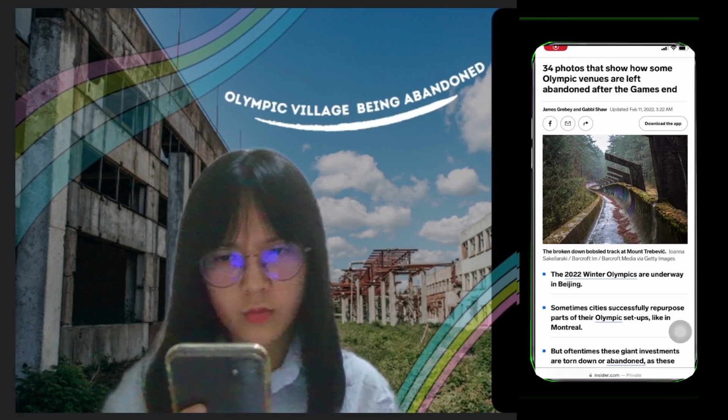Photos that show how some Olympic venues are left abandoned after the game ends. The broken down bobsled track at Mount Trebević. A set of Olympic rings in an abandoned former swim hall at the site of the 1936 Berlin Olympic Village. The media podium at the ski jump venue.

Oh my god, look at this! So terrible. Wait, Malaysia is going to organize Olympic 2024? So how will Sahira solve this issue? So, are you worried about our upcoming Olympic in 2024? No, you shouldn't be worried about that. Just let me bring you to our whole new Green Olympic Village design.

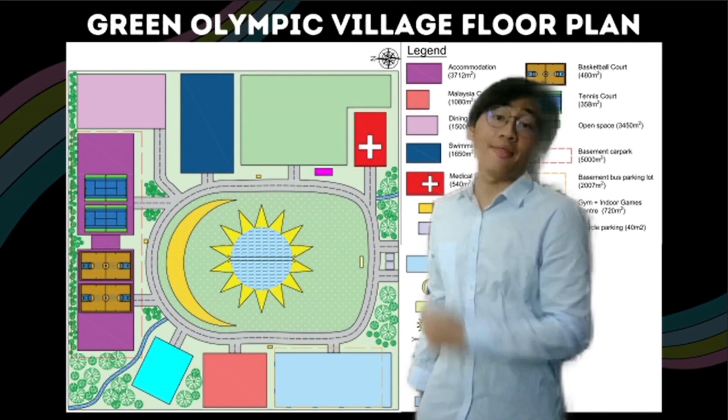Here is the Green Olympic Village plan. Our design is fully considered and follows the GBI rating system. So, in our design, do you think that we only focus on sustainability? Definitely not. We are still focused on family and also cultural aspects in our design. As you can see, there's a lot of things that we can do to encourage Go Green campaigns.

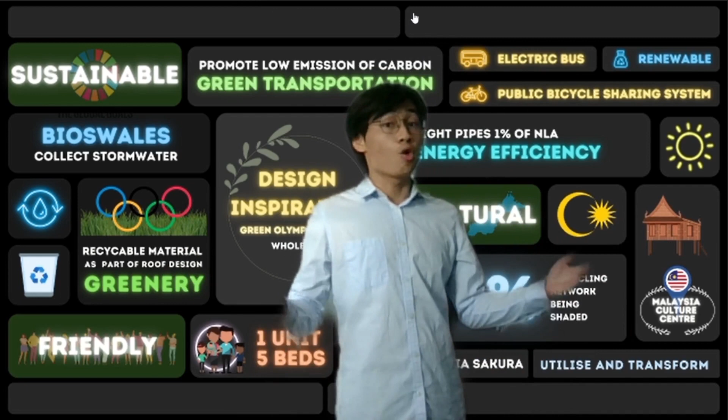Malaysia's new Prime Minister, Ismail Sabri Yaakob, has announced a goal for the country to become carbon neutral as early as 2050. Hence, we introduced Green Plus Malaysia in our design. We have electric bus and also public bicycle sharing system. Therefore, Olympic players can travel conveniently in the village. Having light pipes 1% of NLAs in our facilities, it can obviously provide sufficient sunlight and reduce the electricity cost.

We know that Malaysia is a multi-ethnic and multi-religious country, with a lot of unique cultures here. That's why we have a Malaysia Culture Center with stilt house designs. There will be a lot of cultural information and even souvenirs over there. Applying the Crescent and 14-point star design in our village as a flexible and recreational park will be the most symbolic criteria of the combination between culture and construction.

Just now, we mentioned that we have a public bicycle sharing system. Indeed, we know that nobody wants to ride under the big sun. That's why we have 70% of the cycling network shaded by shade and also trees. We even think of how we want to utilize the stormwater. Then we decided to implement bioswales, designed to collect and transport the water runoff while also removing garbage and pollution. Yes, I know our design sounds interesting, but what's our planning for this village after the Olympic is over?

For the accommodation, we design like a family unit because we promote family in our design. There will be 5 beds in the unit, adequate to fit 1,500 people. After the Olympics is over, this can transform to a residential area as well as a lot of facilities assisted.

To provide a comfortable environment, we decided to plant Tabebuia rosea in our entire village. The nickname for it actually is Malaysia's Sakura, and it is quite trending and popular in Malaysia. We foresee that there will be a lot of players and tourists coming here to have a photo shoot. In the end, this village will get popular and it might ease the transformation from Olympic village to the residential area. Three main focus: sustainable, cultural, and friendly. Definitely will improve the quality of Olympic village for all. Thank you.

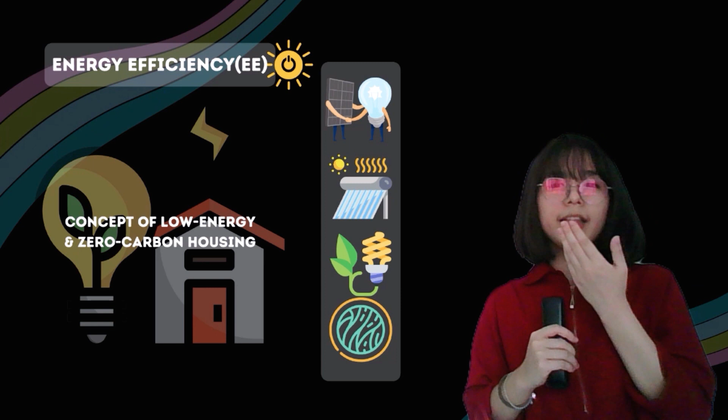I always heard that you need to buy energy efficient devices as it gives a lot of benefits, but what devices do you use inside the building? Well, for energy efficiency, we're applying the low energy and zero carbon housing concept, which aims to provide high living standard and comfort while consuming little energy and reducing the carbon footprint of the building. Firstly, it consists of an active solar energy system, which helps us to save monthly bills and also increase the resale value of the building.

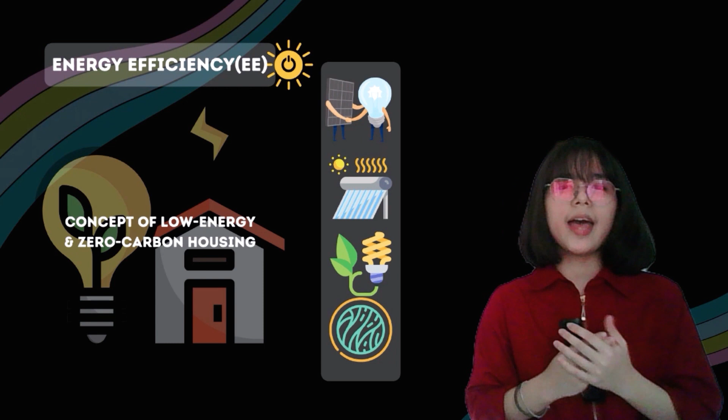Next, we apply solar water heating, which aims to reduce the air pollution and greenhouse gas emission caused by the use of fossil fuel. Thirdly, we use LED bulbs for lighting sources, as we found out that LED bulbs have a long lifespan and will significantly reduce the waste disposed and improve the environmental performance.

Oh, I see. But what could you do to improve the indoor environment quality, as it refers to the quality of the building's environment? Okay, to improve the indoor environmental quality, we apply a green heating, ventilation, and air conditioning system, known as HVAC, that uses solar energy as our power source, with the idea of having balconies with doors open in our building design.

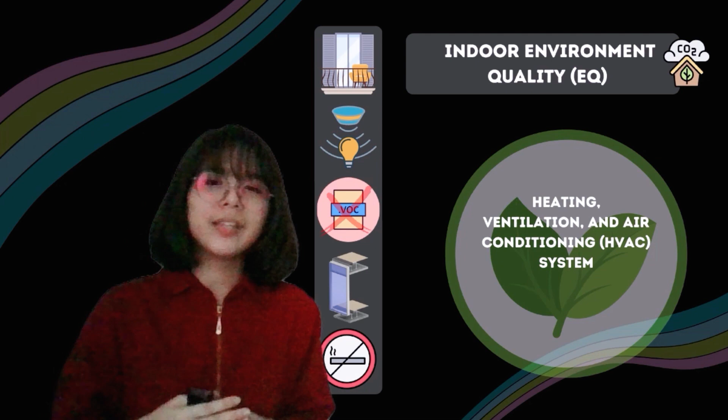There will be an installation of a smart lighting system with a motion detector, useful for safety purposes and energy saving. We also use a closed cavity facade (CCF) to provide appropriate daylighting for the building and use low VOC paint that aims to protect human health and the environment. Oh, okay, I get it.

But since summer lasts all year here in Malaysia, I'm wondering whether you have any ideas or applications for reducing the heat and sunlight in the building. Okay, to overcome this problem, we'll install roofing material with a higher solar reflectance index (SRI) to reject solar heat absorption and maintain a cooler indoor ambient air temperature in the accommodation buildings.

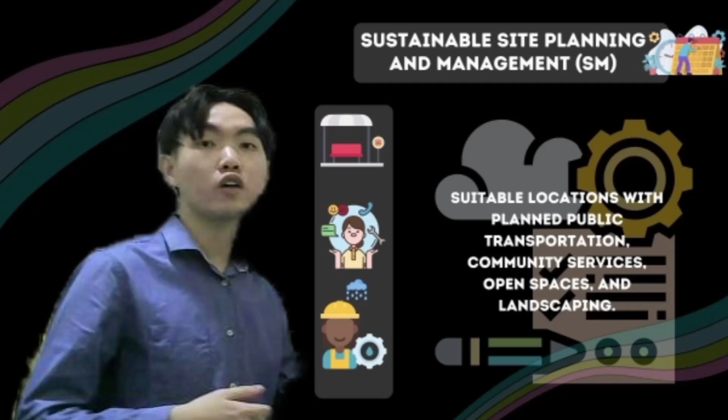So besides, based on the sustainable site planning, our village has public transport such as the electric bus and the bicycle. We also have a rainwater harvesting system to collect and store the rainwater for human use. Oh yeah, I heard just now that the entire building will use green concrete instead of conventional concrete. May I know what's the difference?

Okay, green concrete is a form of eco-friendly concrete that is manufactured by using the waste or residual material from different industries, and it requires less energy to produce. So compared to conventional concrete, it produces less carbon dioxide and is considered cheap and more durable. Besides, our whole building is mainly built from green materials such as bamboo, timber, cellulose, and others.

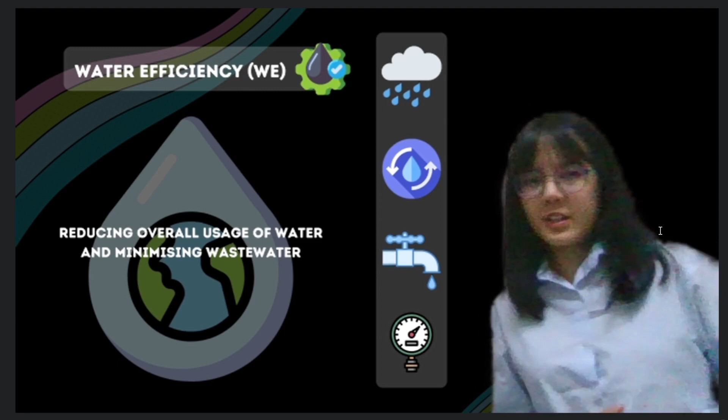Actually, I heard before about water recycling. What's your contribution towards this issue? Okay, in terms of water efficiency, one of the technologies that we have used in our building is rainwater harvesting. It is a technique used for collecting and distributing rainwater to be used for domestic purposes rather than going to the sewage. Besides, another water efficiency technology that we use in our building is greywater recycling.

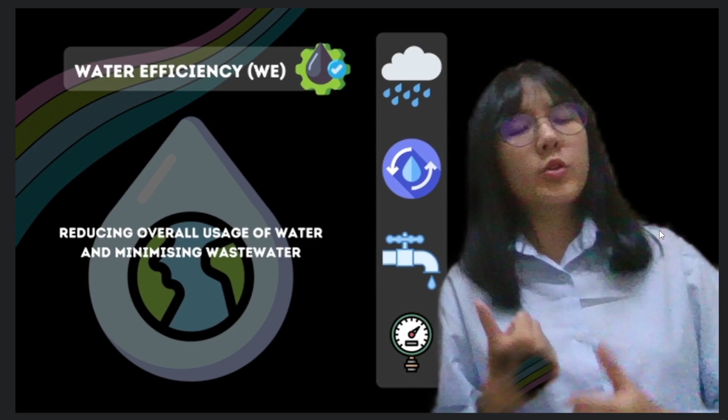It is an effective way of consuming water where the treated greywater will be returned to the buildings to be used for flushing toilets and watering lawns. The third water efficiency technology which will be used in our building is low-flow plumbing fixtures, such as faucets, shower heads, and modern toilets.

It is designed to achieve water savings by having a lower flow rate of water or a smaller quantity per flush. Not only that, it also helps us to reduce the amount owing on our utility bills by consuming less water. Nowadays, engineers keep talking about innovation and technology that is able to improve our quality of life and at the same time protect our mother earth. Can you share with me about the design?

Sure. For your information, one of the green building innovations that we use in our building is the passive house design idea. Its design principle is mainly focused on achieving indoor comfort with as little energy consumption as possible and providing comfort at low operating cost. There are 5 major passive house design principles we have applied in our accommodation, which include a highly insulated envelope, being thermal bridge free, optimized orientation with high performance windows and doors, an airtight envelope, and mechanical ventilation.

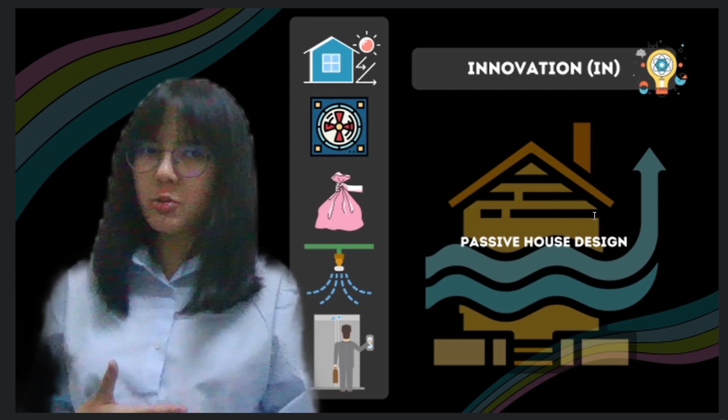Moreover, a central pneumatic waste collection system will be introduced too, with the aim of encouraging and facilitating better waste management. This system utilizes a series of underground pipes to quickly transport refuse to a sorting facility and also directly encourages recycling while making waste segregation easier as well.

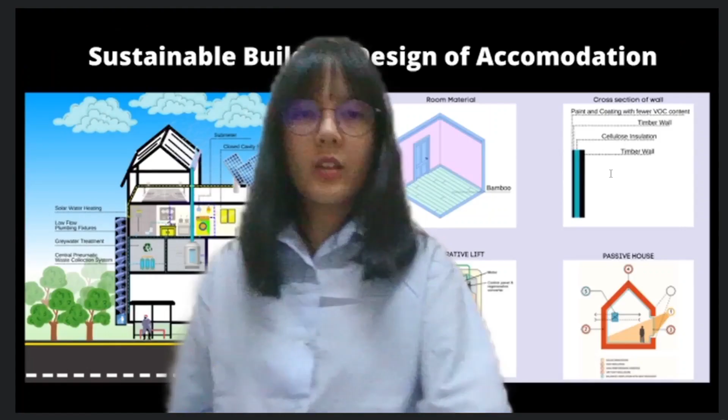Overall, this is our sustainable building design that brings 6 main criteria, which are energy efficiency, indoor environment quality, sustainable site planning and management, materials and resources, water efficiency, and innovation.

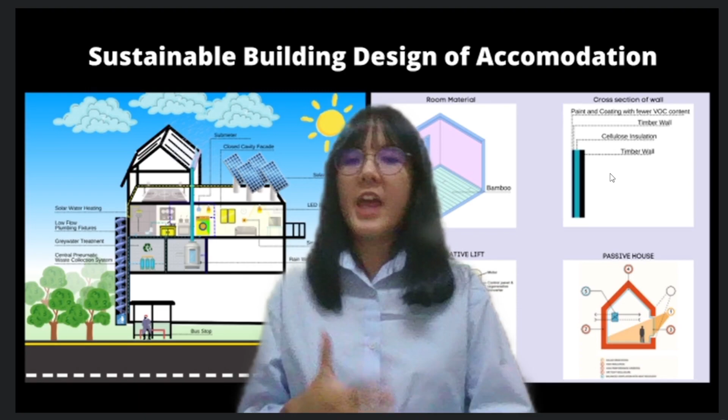Okay, so let's move on to the roof truss design of the open space. This is our roof truss design for the open space. The roof truss coverage area is about 2,800 square meters, which is 40 meters times 70 meters, and the column height is about 7 meters. And the roof truss that we are using is a flat truss.

So this is the compliance of standards. Our design has achieved all of the standard criteria, which are: the length for a single span is more than 10 meters, the column height is more than 5 meters, the roof truss coverage area is between 2,000 and 3,000 square meters, and the deflection for the roof truss is not more than 80 millimeters.

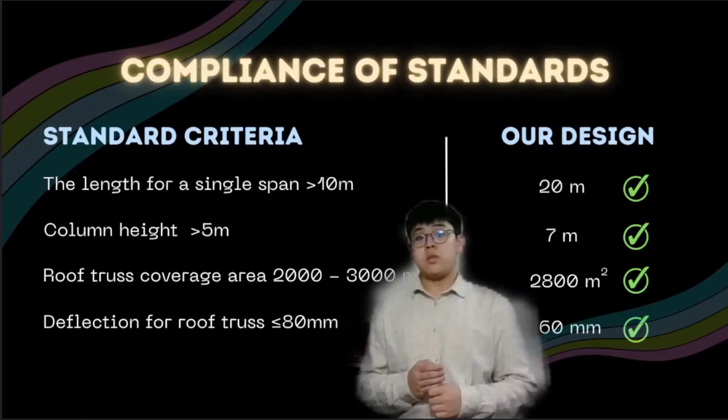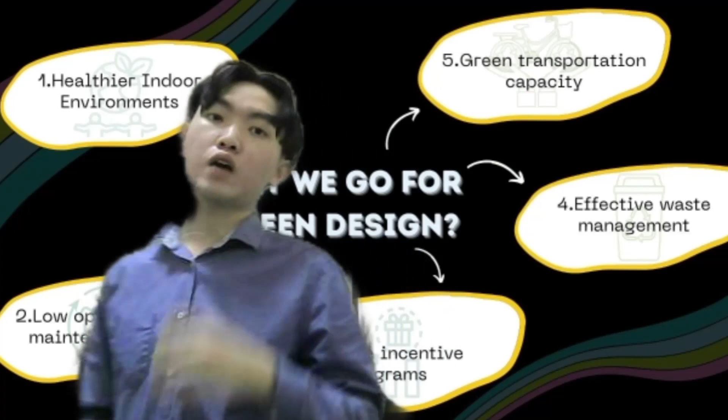Okay, I believe some of you may be curious why we go for green buildings. Now I'll try to explain to you. The first reason is we need to make sure our residents have a healthy indoor environment. Indoor air quality and human health are closely linked, especially in the modern city where we spend 90% of our time indoors. So when we have a healthy indoor environment, the health of the building's residents is protected, stress is reduced, and the quality of life is improved.

The second reason is low operation and maintenance cost. The green building uses less energy and water to operate compared to traditional structures. Our green building has a special feature that ensures that resources like water and energy are used efficiently. So even though green buildings are slightly more expensive to build than their non-green counterparts, the lower operation and maintenance expenses make them significantly more cost-effective in the long term.

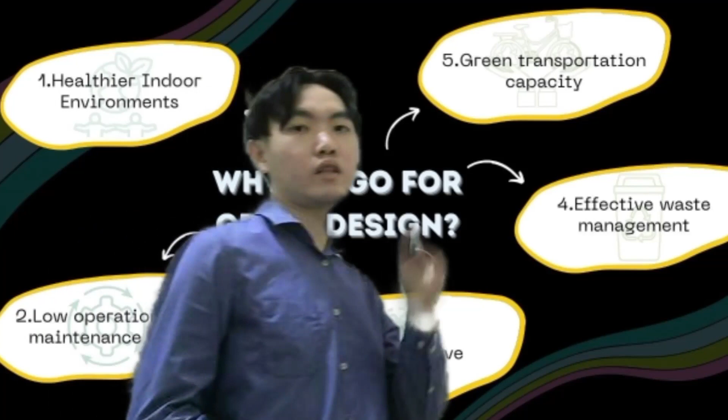So the third reason is more incentive programs. There are lots of incentive programs available for green buildings. They have a list of specialist measures that are eligible for the incentive depending on how the incentive program is constructed. For example, there are tax incentive programs in our country. The Malaysian government has offered tax incentives for the purchase of green technology equipment as well as tax exemption for the usage of green technology services.

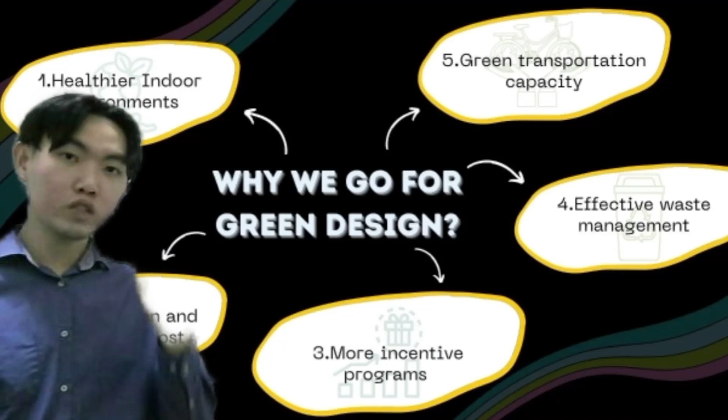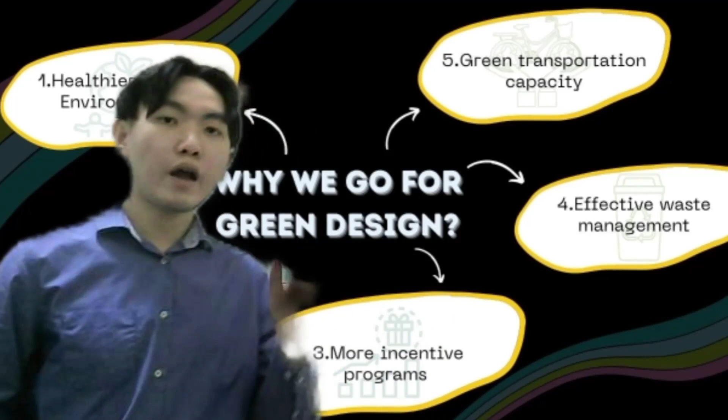So the fourth reason is effective waste management. Our building consists of wastewater management and also the waste collection disposal system. The residents can sort their trash into different types of waste through the central pneumatic waste collection system inside our building. Compared to the old technique of collecting waste using trucks, it requires less personnel to operate. As a result, a lot of money will be saved.

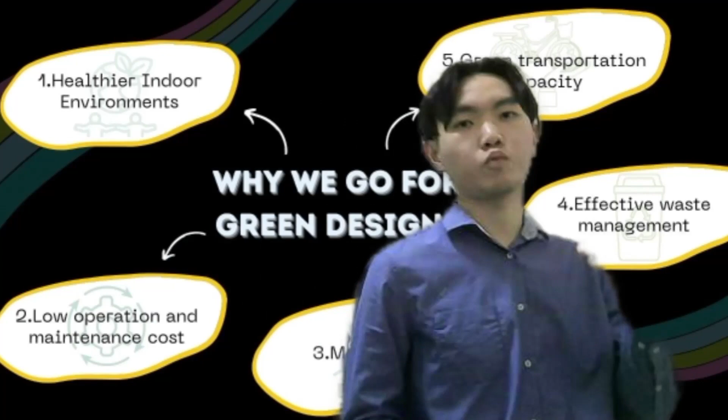So the last reason, which is reason number 5, is green transportation capacity. Our goal is to encourage the residents to use green transportation wherever possible. So we provide low carbon transportation choices to the occupants of the village that can help them lower their carbon footprint and improve their long-term environmental impact.